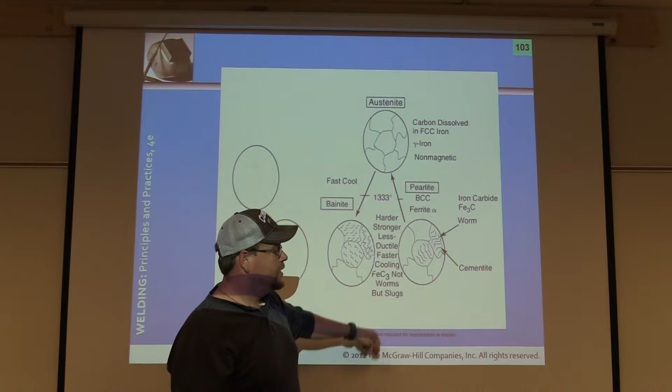You can also see a lot finer grain structure, which is included in higher strength, but it's also more brittle, less ductility, okay?

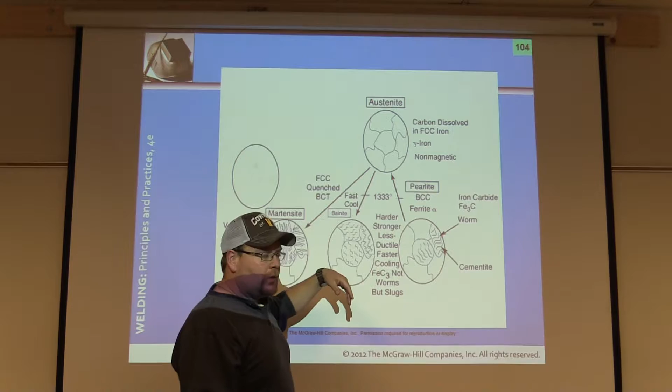Now, if you quenched it, so real quick, before we go any further, we just cooled this one fast, but we didn't dunk it. This could be more aligned with air cooling or normalizing. This would be real slow. But if it's a cold day outside and you just let it cool off normal, if it's 0 degrees or 10 degrees or whatever, and you walk away to let it normalize, and you bring it down and let it cool normally, you can end up with partial bainite and partial pearlite. So it's important to think about your outside elements as well.

Well, I better wrap it up because it is only 10 degrees outside.

So we've heated it up. Now if we quench it and bring it down to a cool temperature very, very fast, depending on whichever type of quenching brine or medium we use, it becomes martensite.

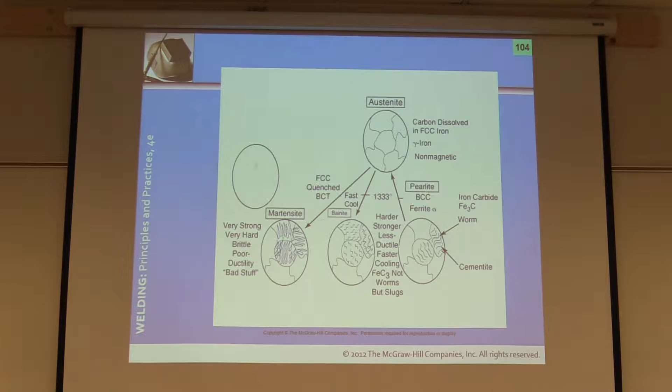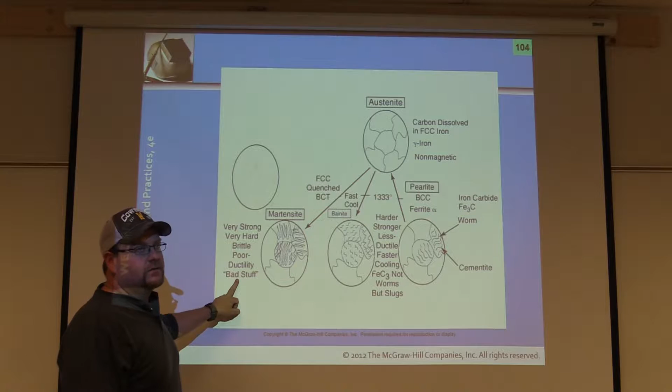Very strong, very hard, but very brittle and very poor ductility. This is bad stuff. Usually you're going to see a lot of cracks, a lot of problems. There's no give to it hardly whatsoever. As you can see, there's a very erratic grain structure, stress marks and so forth.

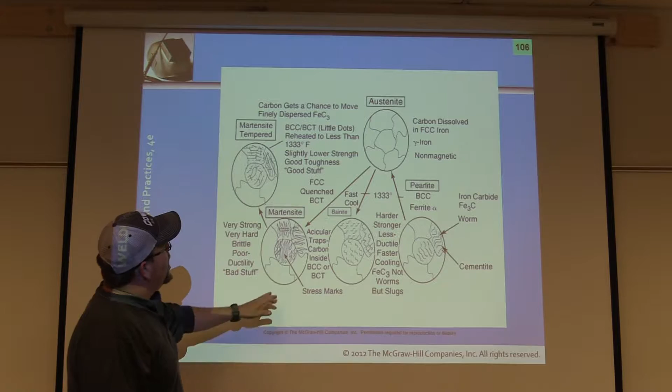However, this does have certain properties that you might want. For example, something that's going to see just abrasion resistance, not a lot of impact or bending stress. A good example might be a piece of road equipment that is going to see a lot of material on it without pounding against the rock, okay? Or a conveyor system, something that is constantly dealing with an abrasive material. You might want it to be very strong so it's abrasion resistant and doesn't wear out.

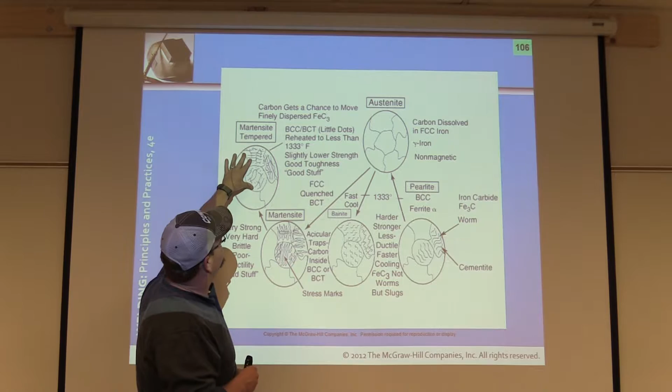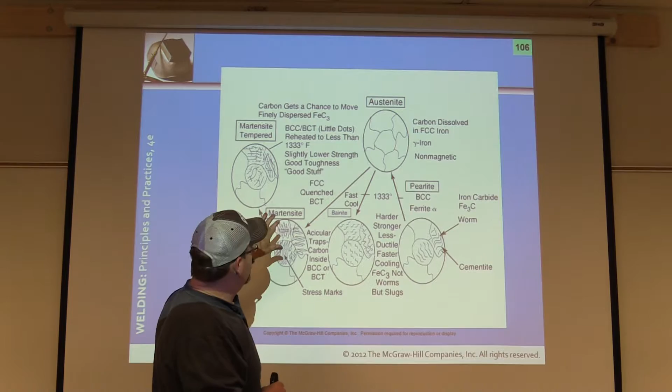But you would like to gain some ductility so it's not as brittle. So then what you do is you heat it back up and temper it. You reheat it to under 1333 degrees. You get slightly lower strength, but better toughness. This is what you want. If you create martensite, typically you want to reheat it underneath the lower transformation, usually about 1200, and let it stress relieve, cool it off, and you're tempering it at that point.

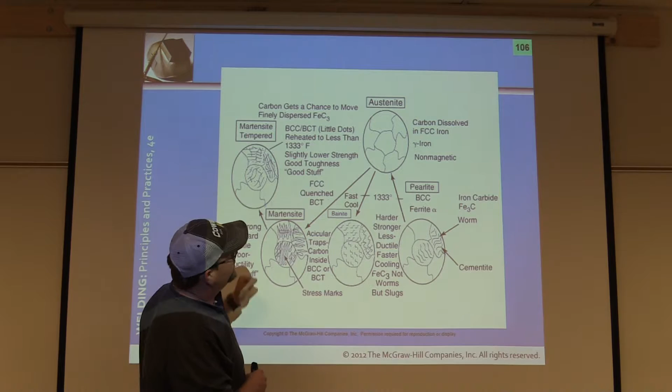So you can see our two pieces here. You cannot go between martensite, bainite, or pearlite without going through austenite first. You have to heat it first, okay?

So, why is all that so important? Is that really something that we deal with on a daily basis when we're welding? Absolutely, okay?

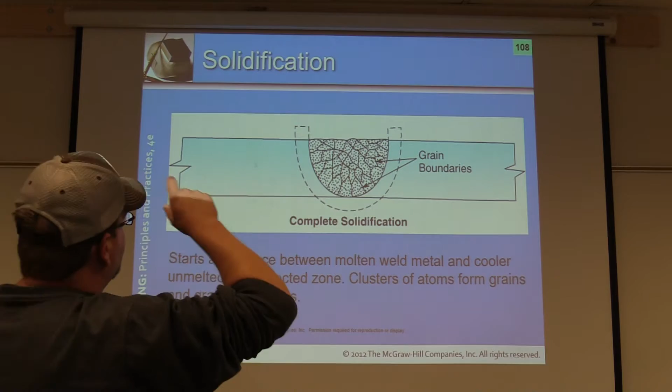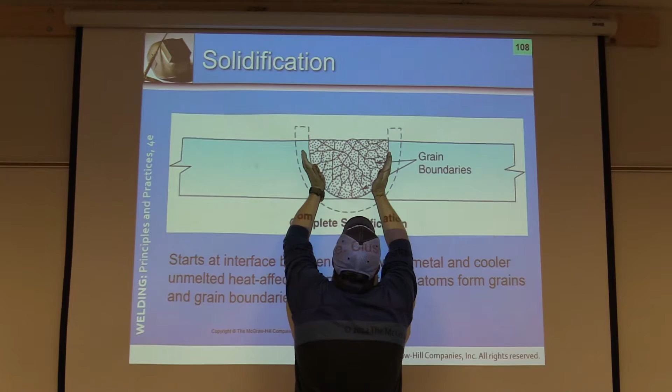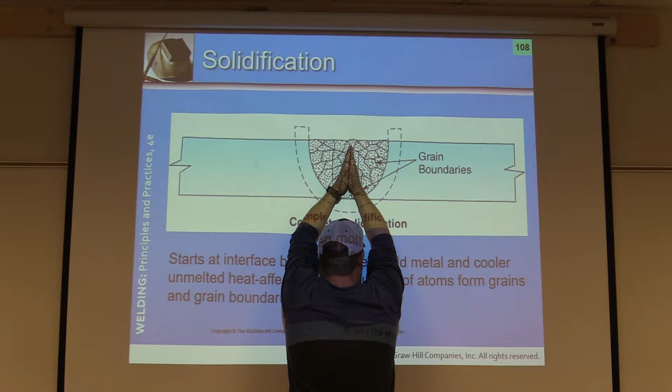In your book, it has 3 different pictures of this, on page 79. What happens here is as you weld, it solidifies fastest on the exterior weld boundary, along the fusion face and groove face, it solidifies here, and then this section in the center slowly starts to solidify. So right here is where we create the greatest part of internal stresses and so forth.

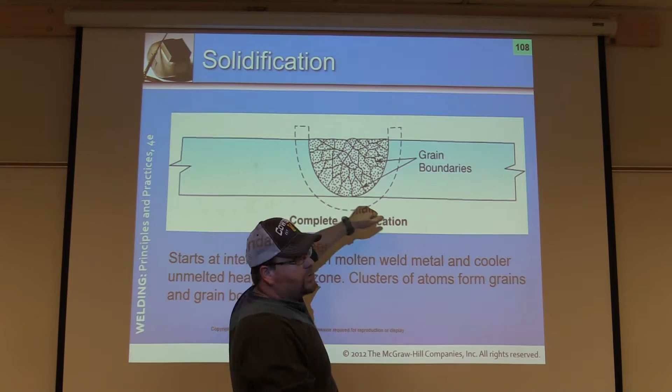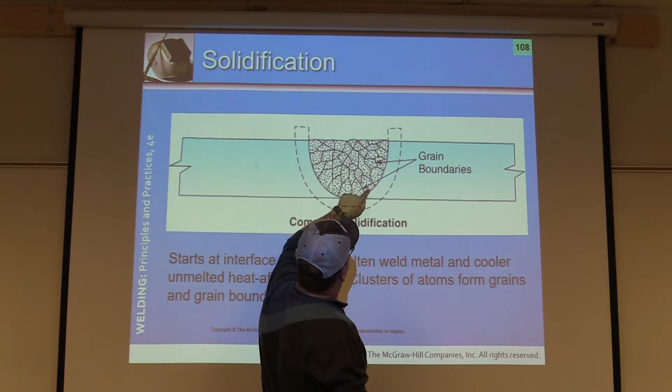Especially with stainless steels, you end up with centerline cracking. Also with brass and so forth, joining dissimilar metals as well. If that's the case, you might be too hot. But you start creating these grain boundaries. As it starts to cool off, the grain boundaries can be tighter and so forth. These can be considered discontinuities on a microscopic level, just the grain boundaries alone, okay?

Grain size effects on the metals. This is important. Make sure you find this in your book and highlight the sections about it.

Along with the iron carbon phase diagram on page 77, we'll talk about the coefficient of thermal expansion as well.

So let me back up since we're there. The coefficient, I'm reading from the book, page 77, right-hand column. The coefficient of thermal expansion is the amount of expansion a metal undergoes when heated, and the amount of contraction that occurs when it's cool.

The increase in the length of a bar 1 inch long when its temperature is raised 1 degree Celsius is called the linear coefficient of thermal expansion. The higher the coefficient, the greater amount of expansion, therefore the greater the contraction upon cooling.

Expansion and contraction will be discussed in more detail under the effects of welding on metal, pages 104 to 114. I don't know, I think we'll get there in this chapter as well. Maybe.

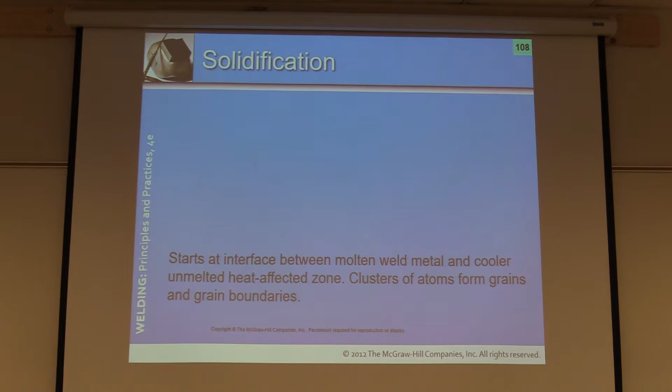I want you to look below that on hot shortness, highlight and understand what that is, specifically dealing with—you'll see it a lot in aluminum.

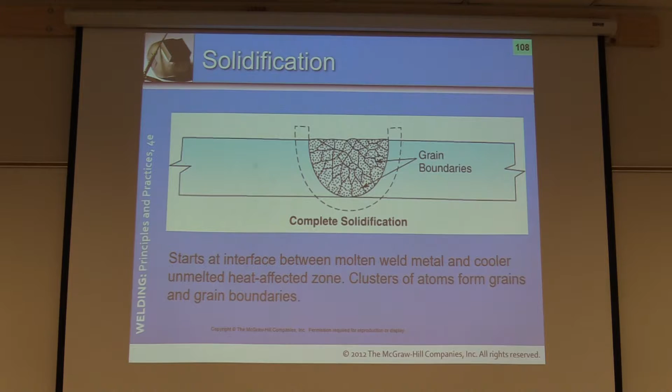Moving on, page 79. Grain size effects on metals.

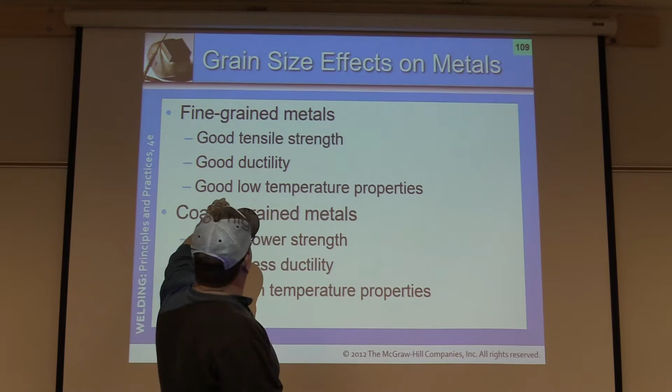Fine grained metals have good tensile strength, good ductility, and good low temperature properties. Coarse grained metals have slightly lower strength, less ductility, but still have good high temperature properties.

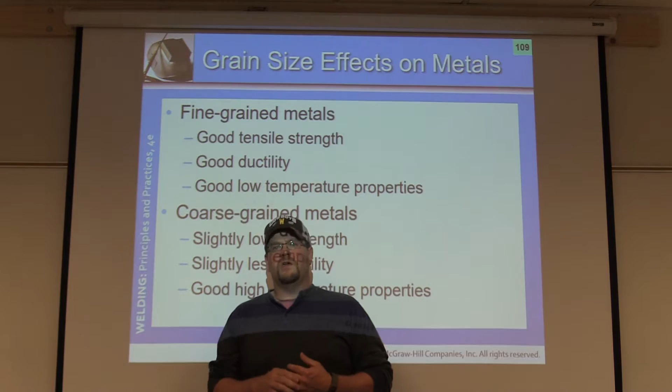The way I describe fine grain and coarse grain materials is very simple. Most of us are familiar with OSB board or chipboard plywood versus the old school plywood. The newer finer grained OSB board has all the little grain structures and pieces of wood put together, glued and pressed. The old structures of plywood were more long grains put together and pressed together.

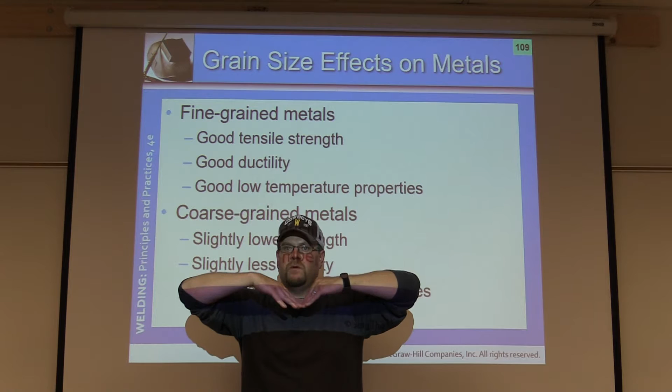If you see many of those bent, you'll notice that usually a finer grain structure with a smoother surface—the OSB—has more ductility and bend to it with great strength. The old school plywood, if you bend it and it stays like that for very long, it starts to splinter. So it's coarse grain structure versus finer grain structure.

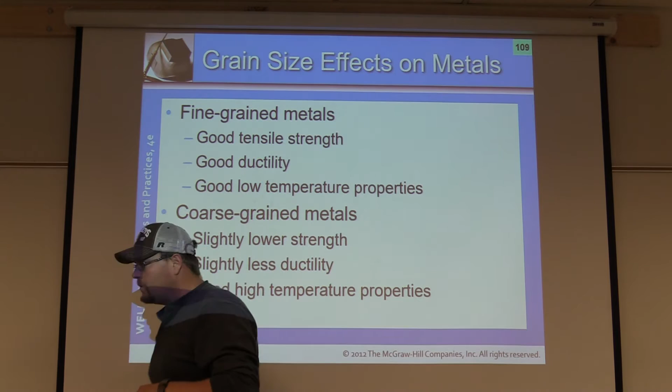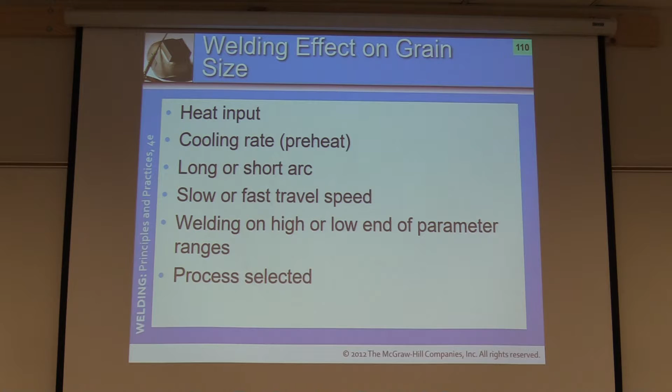Welding effect on the grain size: the heat input, cooling rate, longer or short arcs, travel speed—all the essential variables we talked about. We know this at this point.

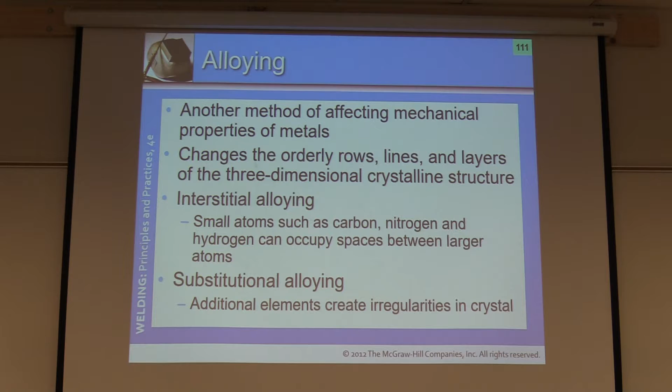Alloying. So real quick, we talked about case hardening, nitriding, and so forth earlier. These PowerPoints are kind of scattered around. I wish they would be a little more in line. However—

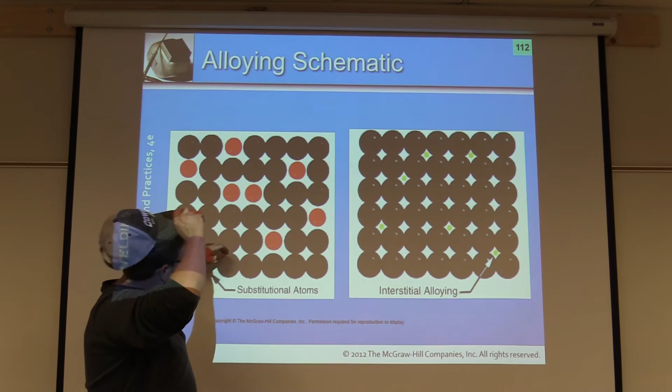Substitutional alloying versus interstitial alloying, okay? Real quick, these are your atoms, your steel atoms. If the atoms are small enough, they can fit within.

This is a good example of carbon. Carbon can go within your iron atoms, your ferrite atoms, and help fill the voids in the meantime. They will bond to the center. This one right here—this is a substitutional alloy.

So this might be a chromium. This is how we change stainless steel, right? The majority of this stuff, 12% of it's going to be chromium, more of the iron is going to come out of it. Still steel—it has iron in it and carbon, but—

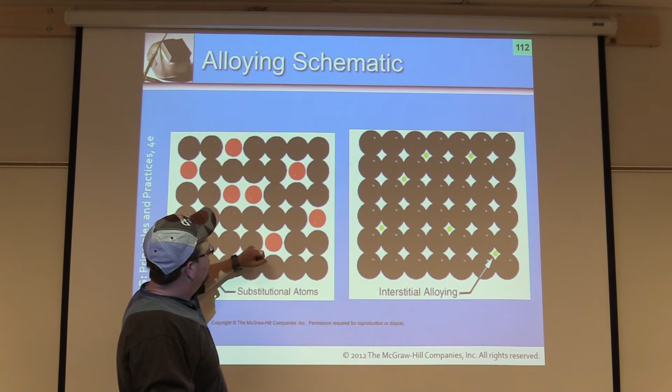Certain grades of it, and we want to make sure that we're here. The atom that we're alloying is too big to fit within the boundary, so it substitutes itself, pulls one portion out of it, okay?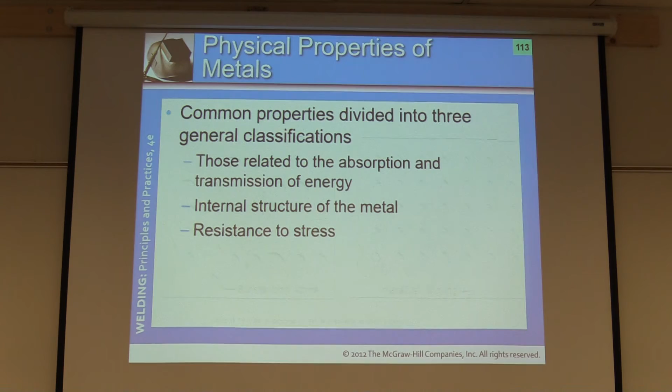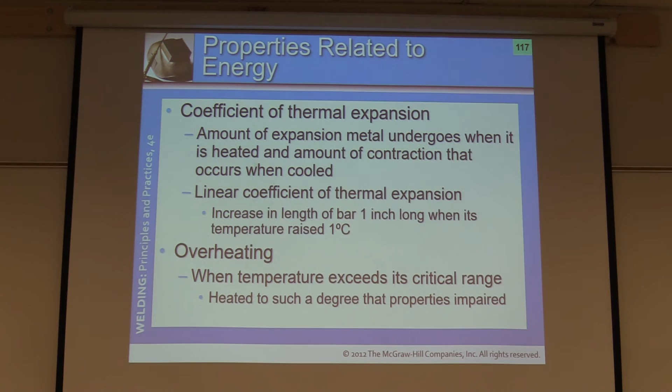I jumped a little ahead a minute ago, I'm sorry about that. Weldability, fusibility, volatility—I want you to read through these on your own, and understand them. Very important pieces as well.

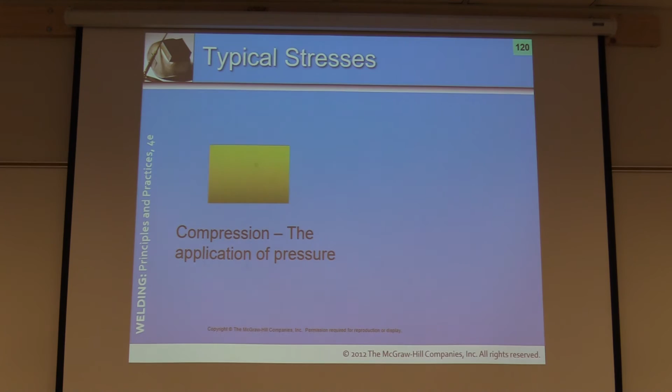And we're going to keep moving on. We still have quite a bit to cover within this chapter.

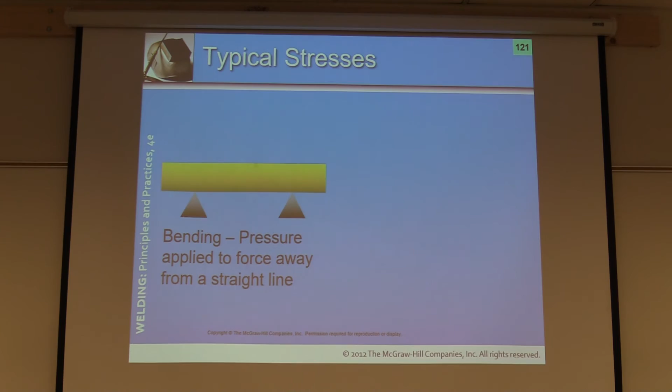So we talked about typical stresses. Bending: pressure applied to force away from a straight line. So example here, deflection.

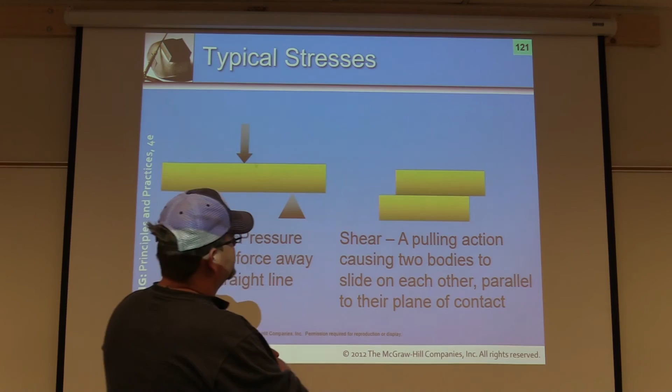Shearing: a pulling action causing two bodies to slide upon each other. Torsion is the twist.

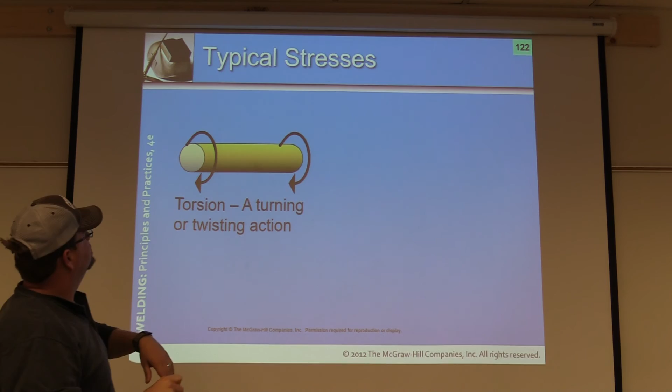Fatigue: by repeated stretching, twisting, compression while in service. Can be in many different directions.

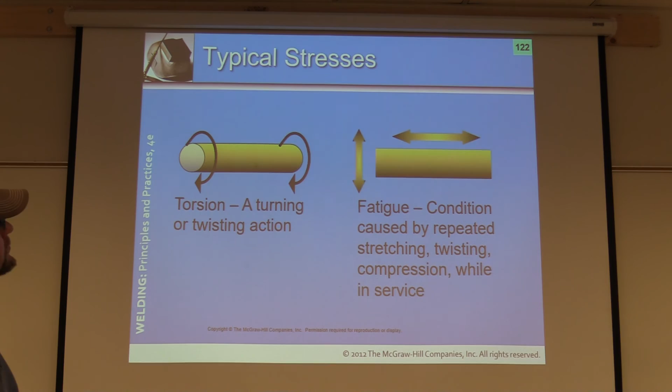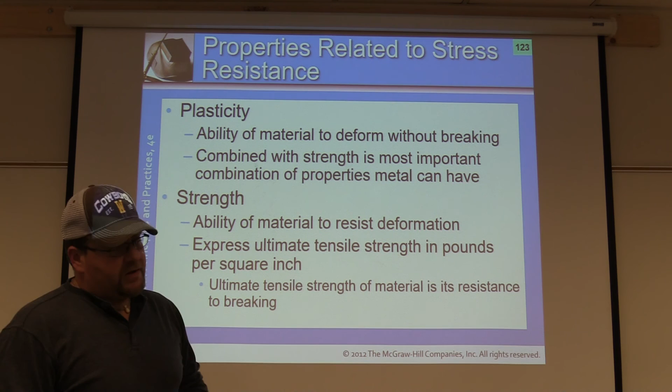Okay, we're going to take a break here before we get back to plasticity.